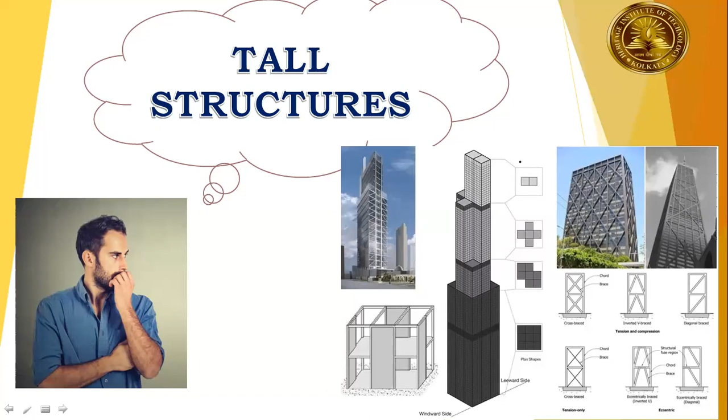Whenever we talk about tall structures, the first question that comes to mind is what should be the height of the structure so that we can consider it a tall structure. Because structures, according to designers and architects all over the world, are mainly classified into three basic types, even though that is subjective: low-rise, mid-rise, and tall or high-rise structures.

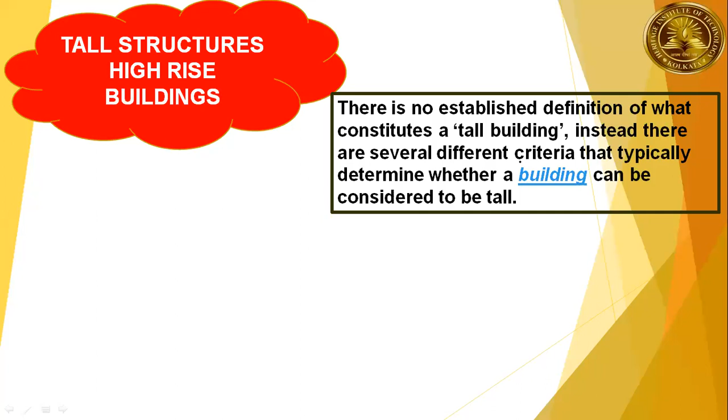As I told you, tall structures or high-rise buildings do not have a particular definition given in the code or some guidelines. It is very subjective. Actually, a tall structure depends on the surrounding environment or the height of the surrounding buildings existing nearby. As a basic criterion, the National Building Code in 2005 defined a high-rise building as a building with more than 15 meters or 5 stories.

It was way back. You can see it was defined in 2005 and it is 2022. So over the last decade, this definition has changed and it has been updated to a height of, just a minute.

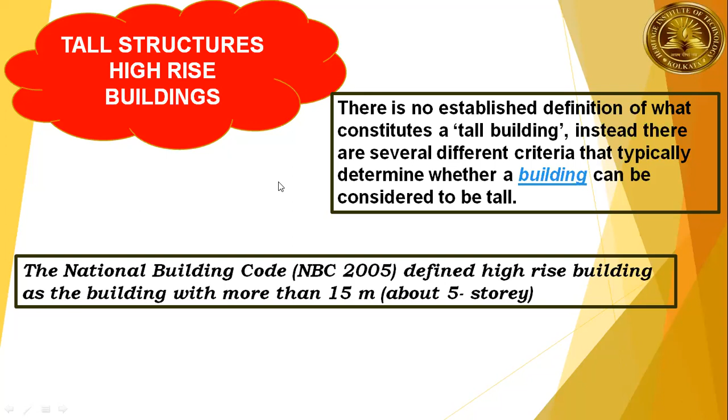So over the last years, this definition has advanced, so that we can define a tall structure as having a height of more than around 50 or 60 meters. The Council on Tall Buildings and Urban Habitat, a foreign organization, defined tall buildings as super tall when more than 300 meters.

Sometimes super tall buildings have turned into mega tall buildings, with height more than 600 meters. If I take the height of a floor as 3 meters, that is almost around 200 floors. So usually when the structure contains more than 100 or 150 floors, we consider it a tall structure, skyscraper, or high-rise building.

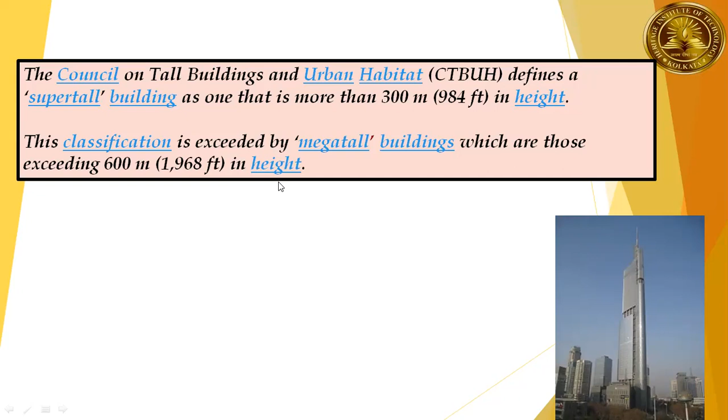With the advent of the design and construction of these structures, a key point comes into the picture: along with the wind load, we also have to consider the seismic or earthquake load. We have Indian codes, IS 1893, 2002 version and 2016 version, which talk about seismic analysis. These are some of the well-known and renowned structures all over the world.

Now coming to the seismic or earthquake study. Before directly going into how to calculate the earthquake load, we have to first learn about the basis of earthquake engineering. This basis of earthquake engineering lies in geology.

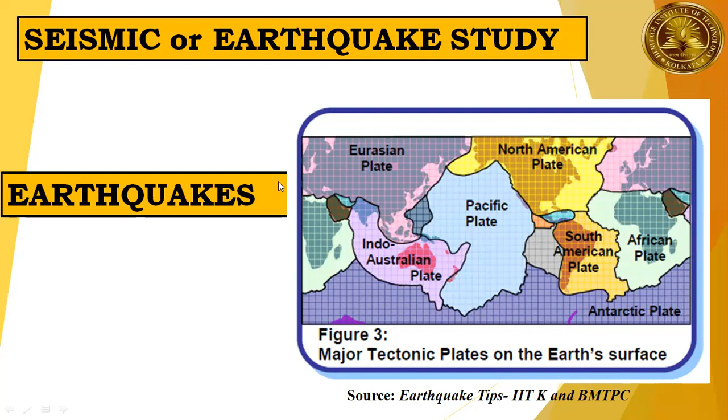The major tectonic plates of the Earth's surface are basically classified into 6 to 7 different plates. We have the Eurasian plate, North American, Pacific, South American, African, Indo-Australian, and Antarctic plate. Our Indian subcontinent lies on the Indo-Australian plate.

Now, what is the main thing concerning this plate? Whenever these different plates lying beneath the Earth's surface collide with each other, either in convergent or divergent form, a huge amount of energy is released in the form of elastic waves. This huge amount of energy developed beneath the Earth's surface causes excessive stresses, resulting in seismic excitations or seismic tremors. These are also known as earthquake excitations or ground motion.

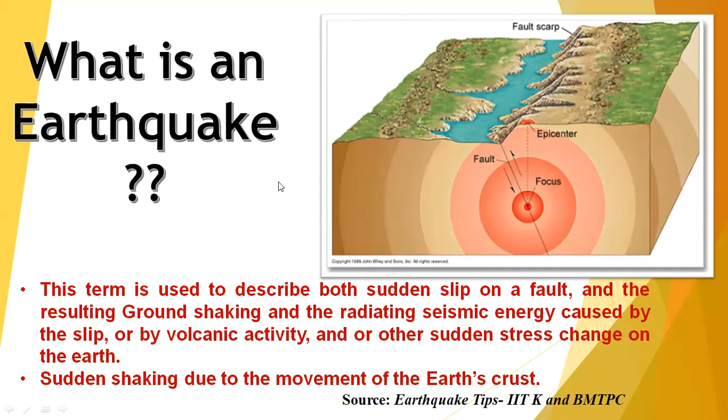Coming to the pattern by which tectonic plates collide, they can be parallelly colliding, like there are some slips. We can see the zone where the two plates collide, or stresses generated at the interface. This is called a slip or fault, also known as the fault line.

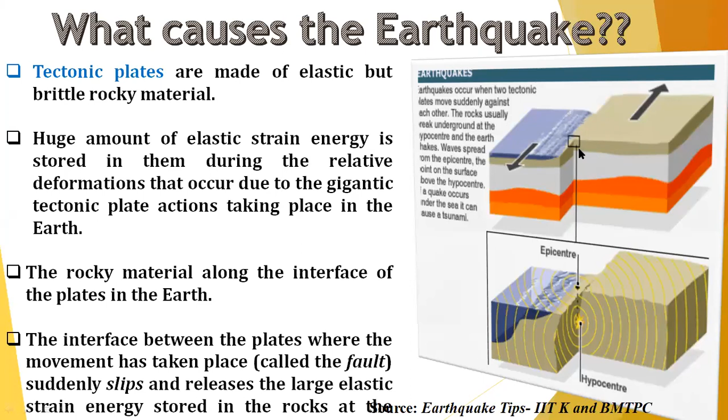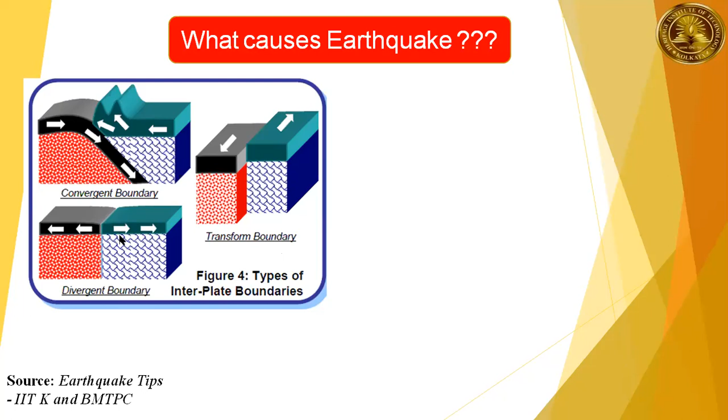Sometimes we have a convergent form of collision. We have a transform boundary, where two plates are parallelly sliding against each other in opposite directions, or sometimes divergent boundaries. So three types of boundaries or faults can take place.

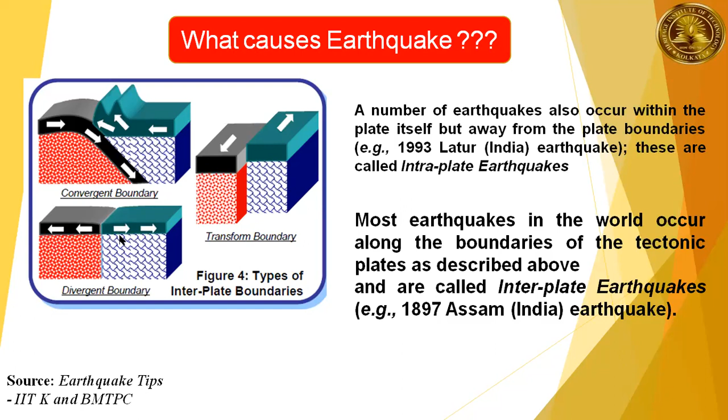Most earthquakes in the world occur along the boundaries of tectonic plates. We have the interplate earthquake, which was the result of the Assam earthquake in 1897. Some fault took place where the plate boundaries collided face to face, which is called an intraplate earthquake. That was also the result of the 1993 Latur earthquake.

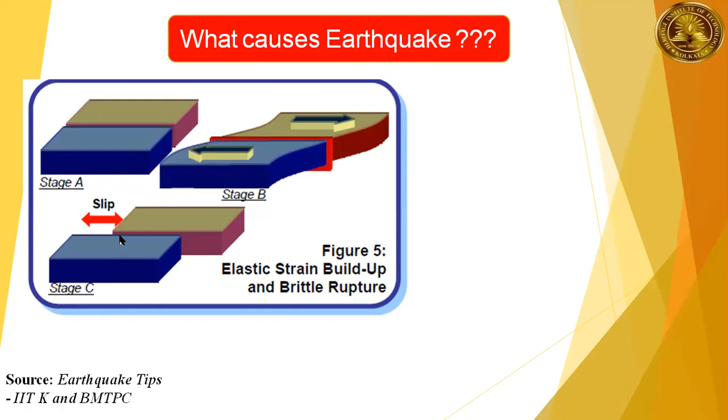So these are the various types of slips. As I told you, there are many types of faults or slips that take place causing earthquake tremors. This energy dissipation involves a huge amount of energy, which causes earthquake waves acting on the structure.

Now we can see the elastic rebound theory, or we can see that the energy is basically in the form of dynamic loading. I would just intervene one second.

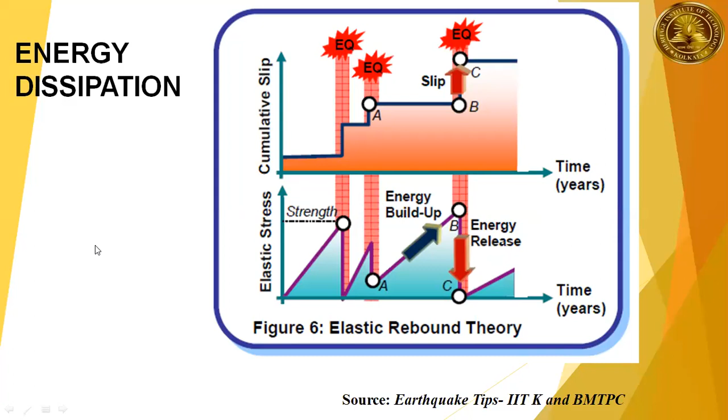So coming to this, how does the ground shake? After the dissipation of energy, there are ground tremors. These ground tremors or ground waves are also classified into different forms: surface waves and body waves, acting on the surface of the earth or sometimes beneath the earth's surface.

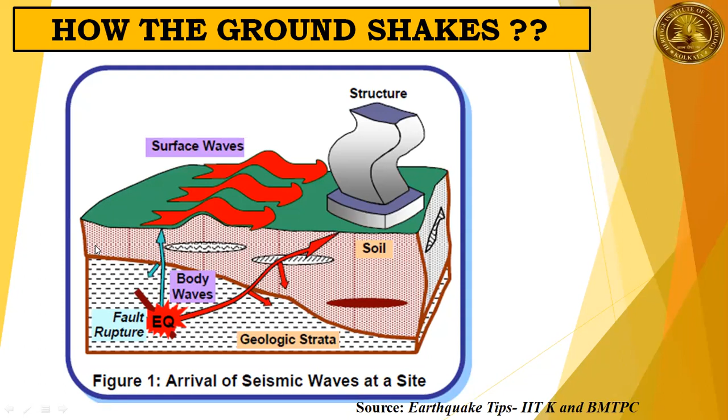We mainly have P waves and S waves. P waves are basically body waves, and there are also surface waves. The body waves consist of primary waves and secondary waves, and the surface waves consist of Love and Rayleigh waves. P waves are transmitted in a push-pull format, meaning some zone is extending while some zone is compressing. S waves involve side-to-side vibration taking place.

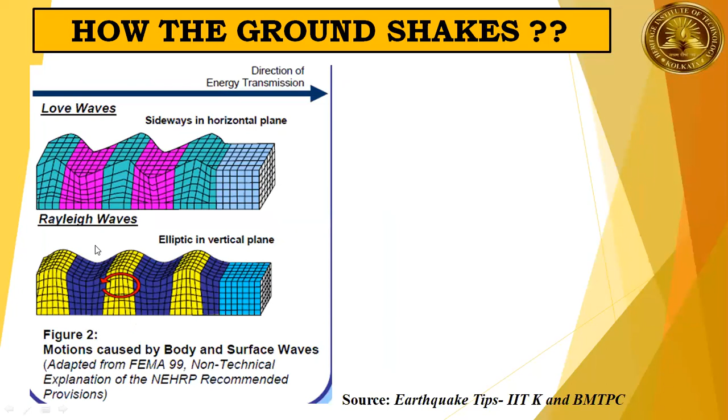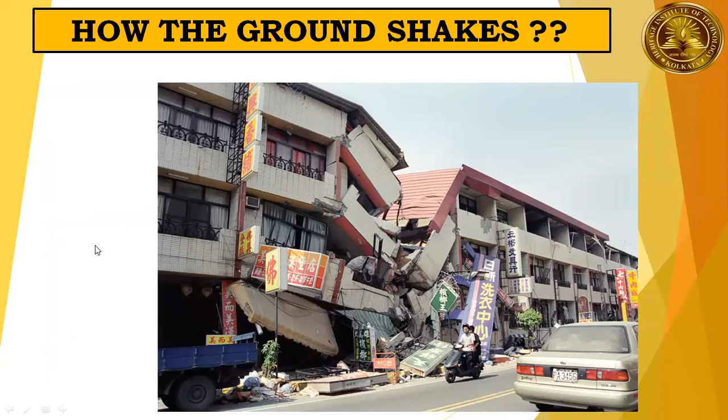We also have Love waves and Rayleigh waves. Compared to all four types of waves—Love waves, Rayleigh waves, S and P waves—the S wave is more disastrous. As we know, the after-effect of ground excitation is complete collapse of property and loss of human life.

So if we talk about how to find out the seismic measurement, or how to calculate the earthquake forces acting on the structure, the first type code was IS 1893 Part 1 2002. This is the old code. Now we have the 2016 version, which is the new code.

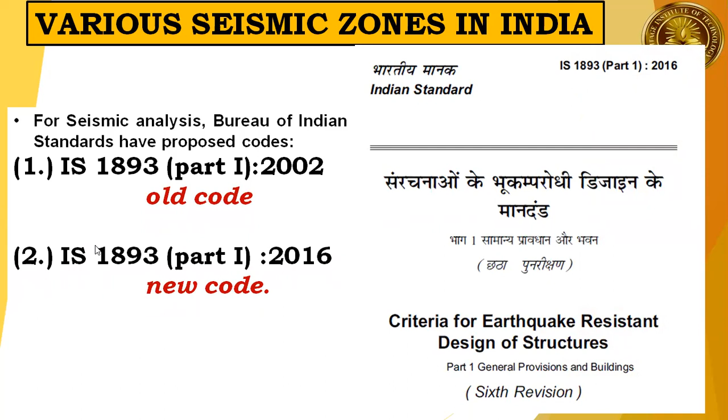So this is the front page, the IS 1893 Part 1 2016. This is the latest code, which had some revisions based on the older code. So if you talk about some past earthquakes which took place in India, these are based on the study.

So how did the study take place? The study was based on a huge amount of data obtained from the Geological Survey of India, collected over the last 100 to 200 years. Based on this data, the date of the event, time, magnitude, area, and the amount of loss of life and property loss were studied.

Based on this study, the various seismic zones in India are classified into 4 main zones: zone 2, zone 3, zone 4, and zone 5. As we progress from zone 2 to zone 5, the intensity increases.

Now what are zone 2, zone 3, and zone 4? Zone 2 is basically the area which is plain land, not hilly areas. So these plain land areas are less susceptible to earthquake damage.

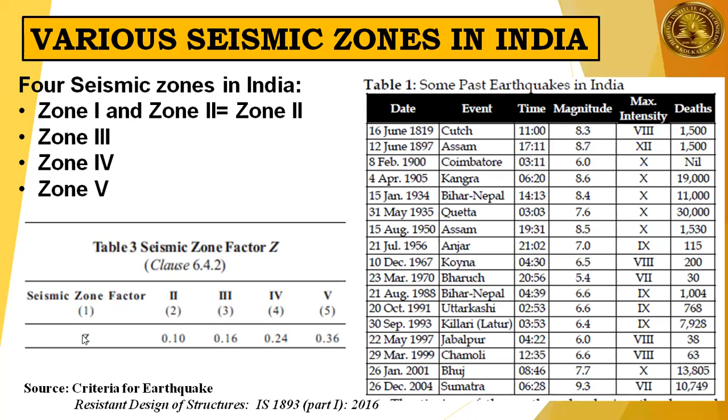Along with these zones, we have the zone factor value, the Z value. This value will be required later when we learn equivalent static analysis based on seismic analysis. I will come to those formulas, but for now, let us know that this zone factor has some value associated with the various zones in India. This is the map of various zones from zone 2 to zone 5 given in the older code.

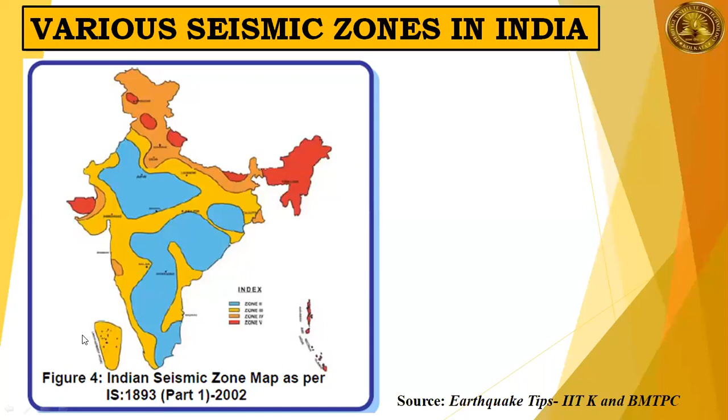Now coming to the mechanism or structural dynamics acting behind earthquake engineering: whenever we have ground motion or seismic excitation acting on the structure, these waves or vibrations are transmitted throughout the building. This is the equation for multiple degrees of freedom, MDOF. We have two types of degrees of freedom systems: single degree of freedom, SDOF, and multiple degrees of freedom, MDOF.

This is the force equation where we have m times x double dot, which represents the inertial force, where x is the displacement, x dot is the velocity or first order differentiation, and x double dot is the acceleration or second order differentiation. So we have mass into acceleration, plus C, which is the damping coefficient, plus K, which is the spring constant, representing the restoring force.

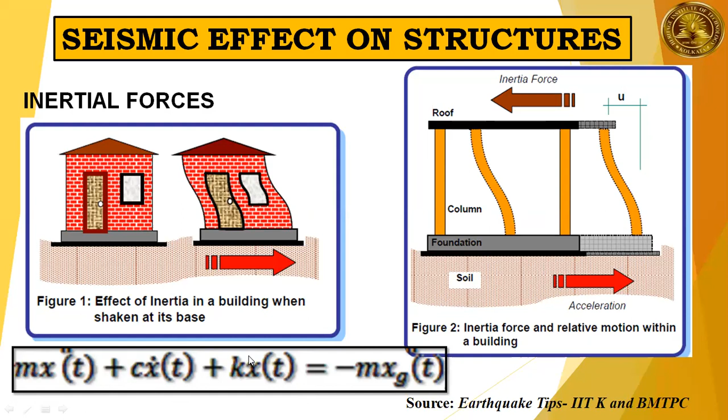This is basically the multiple degrees of freedom equation, the most critical type of differential equation based on which a structure vibrates. Whenever there is acceleration or ground motion acting on the structure, there is some restoring force acting on the building. Based on this mechanism, this equation has been developed.

Now, what are the various directions along which seismic forces act? Since it is a lateral force, just like wind load, earthquake load acts in the horizontal plane. If we take X and Z as the horizontal plane, we can have forces in positive X direction, negative X direction, positive Z direction, and negative Z direction - positive X meaning the right side and negative X meaning the left side. So the forces act in both directions of the X and Z directions.

This is how we put the loading, or impart the loading, on the structure when we model it in finite element software like StaadPro or ETABS or other sophisticated software.

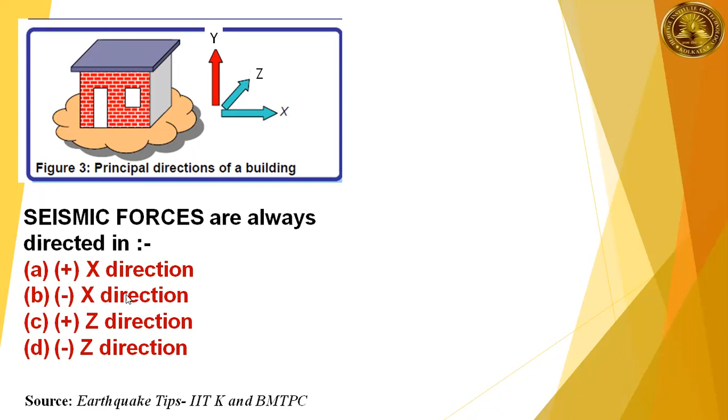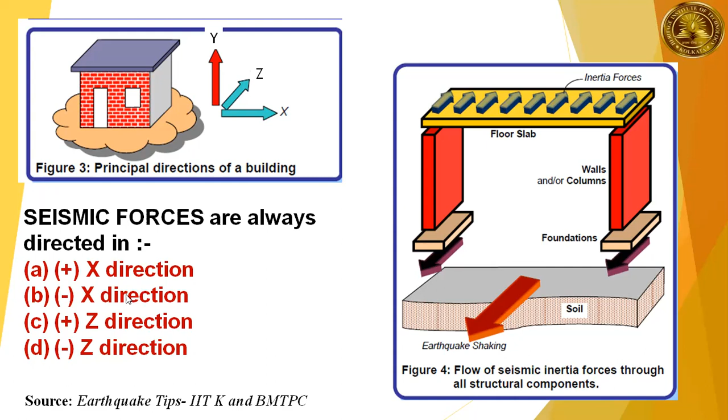So this is another pictorial representation of how the inertial forces act on the slab, walls, and columns, and the foundation. The foundation will be shaking in the direction of earthquake, while the beam, columns, and slab will be subjected to inertial forces in the opposite direction.

The worst effect leads to huge, hazardous loss. I have taken some pictures from the BMTPC guidelines. The left corner diagram shows the collapse of a masonry structure. The right side shows the collapse of an RCC structure which took place in Bhuj, Gujarat in 2001. After this Bhuj earthquake, the entire approach to earthquake study in India changed.

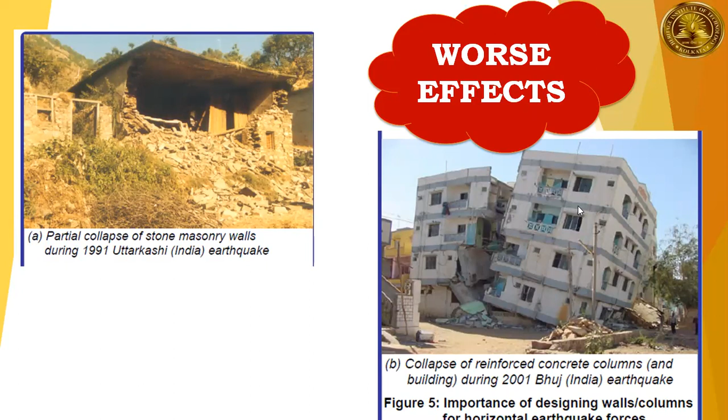Now coming to what is the solution. The solution is basically the performance-based design. Whatever design we studied at undergraduate level takes place within the elastic limit - elastic design according to IS codal provisions like IS 456/2000 or IS 800/2007 for steel. But nowadays, besides architectural and aesthetic considerations, we have to go beyond the elastic limit and design for inelastic loading also.

So this is the advent of performance-based design. What is performance-based design? It is a special, advanced type of design, apart from normal traditional designing, which takes into consideration what will be the performance of the structure post-earthquake. That means we will be able to visualize the type and pattern of failure if a hazardous earthquake or natural calamity occurs on the structure.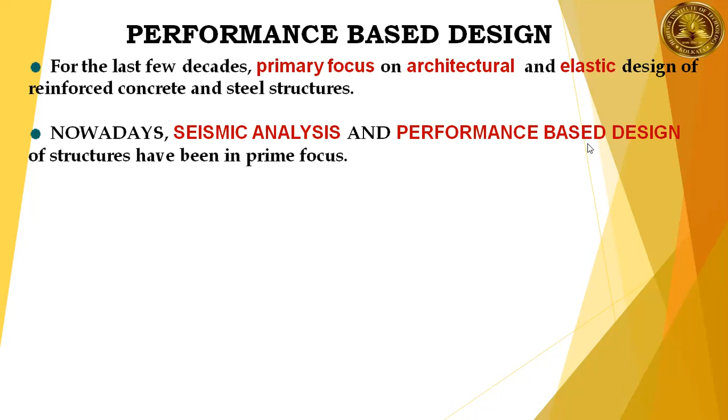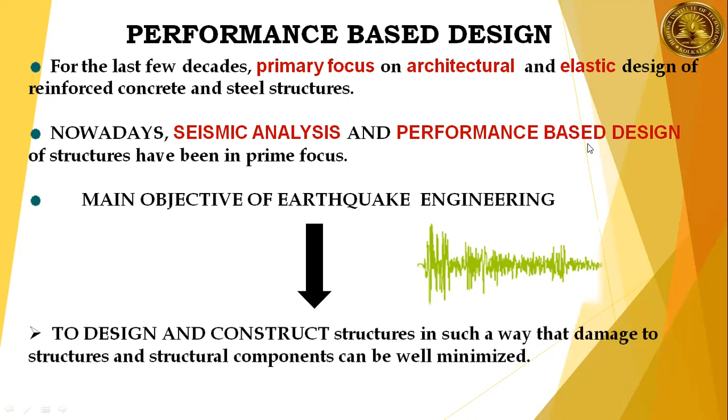Since today we are more focused on seismic analysis, I will be discussing earthquake forces. The main objective of earthquake engineering is to design earthquake resistant structures. There is nothing called non-earthquake design - the design is earthquake resistant structure.

That means it has three philosophies. Coming back to the Indian IS codal provisions, the main philosophy is that we have to design and construct an earthquake resisting structure which will be able to minimize the loss of property and life whenever earthquake hits the structure. It is absolutely impossible to save aesthetic properties like glass, facade, doors, windows - this property loss cannot be curbed. But the main philosophy is that the total integral structural property should not fail.

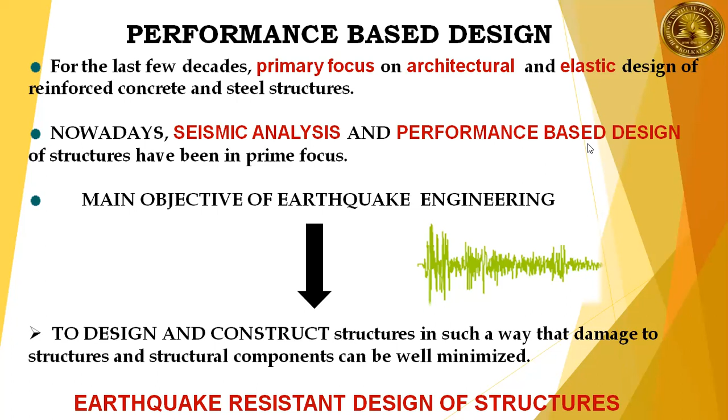That means we will be able to design such structures which will minimize the loss. We cannot completely eliminate the loss.

Now coming to the latest code, I will be discussing various codal provisions based on IS 1893 2016 version. We all know the main concept was derived from the 2002 code, so whenever we learn the 2016 version code, we have to also go through the 2002 version.

So we have dynamic analysis and the simplified or direct method. This dynamic analysis is a more realistic approach - more critical compared to the less tedious, easy method. The less tedious method is the lateral force procedure method, also known as equivalent static analysis method or equivalent static force method. These three methods are basically the same method - a ready-made method.

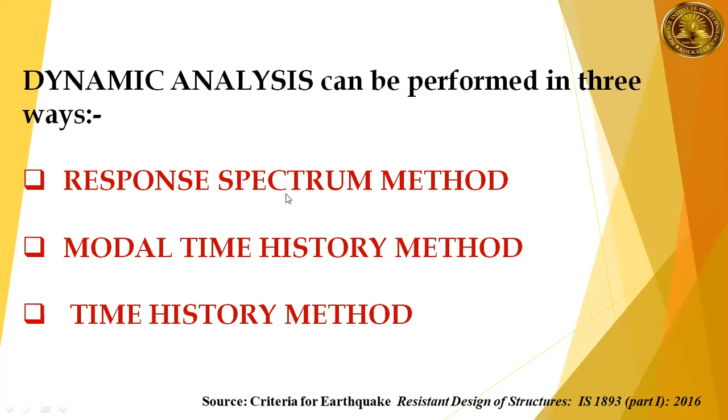As I told you, this dynamic analysis includes response spectra method, modal time history method, and time history method. Another method not mentioned in our code, but mentioned in foreign codes like FEMA (Federal Emergency Management Agency) FEMA 356 given by the US, includes pushover analysis. Pushover analysis is basically a static analysis, but inelastic static analysis. This is also a performance-based method.

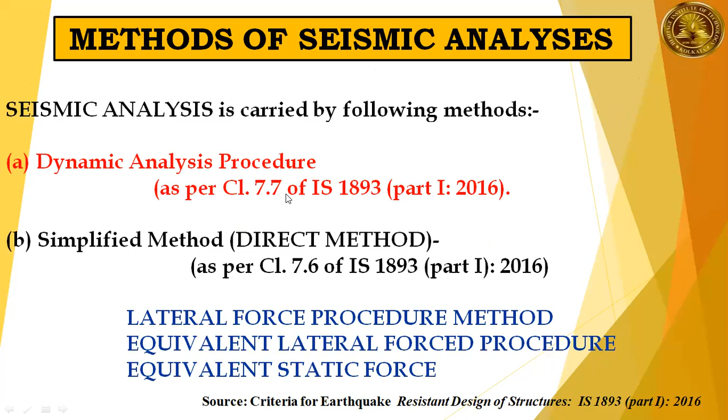So coming to the equivalent static analysis according to the 2002 and 2016 version. So first of all, what do we have to find out? These earthquake forces are transmitted throughout all the floors of the structure. At every floor, this total load is distributed based on a certain formula. So before that, the first step is to find out the natural time period, the natural time period with which the structure is vibrating.

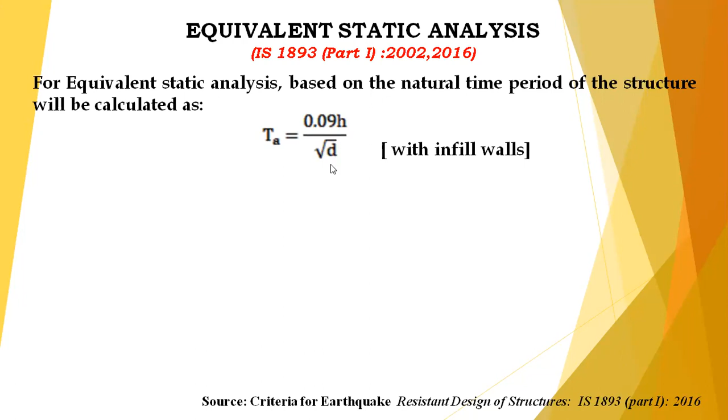This time period may be different for different structures. It can be defined for RCC. This time period formula can be defined for steel structures like that. Now, this is a formula: time period is 0.09 H divided by root D, where the structure is containing infill walls. That means we have partition walls as well as exterior walls. This is the realistic approach.

That is 0.09 H, H means the height of the building, divided by root D. D is the dimensional length, the length along the dimension, for example the X direction. So we will take the plan of the building and measure along the X direction how much the length is. And for the Z direction also, we will calculate the length. So basically, we will have two natural time periods, Tx in the X direction and Tz in the Z direction. The minimum of these two time periods will be considered.

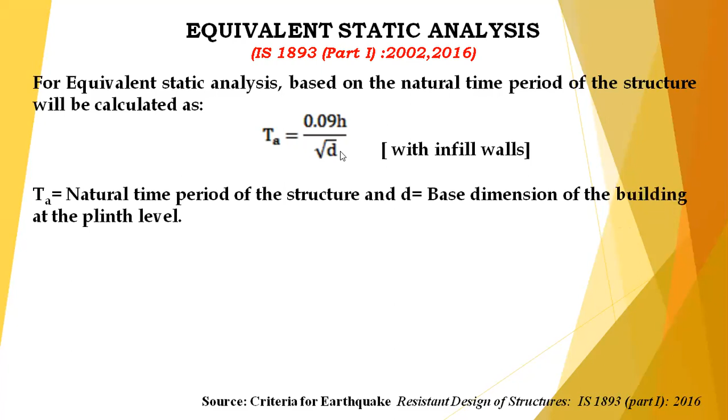So everything is given. After calculating the natural time period, we will calculate the design horizontal seismic coefficient. It is a coefficient based on all these parameters, where Z is the zone factor. Zone factor, as I told you, is a value based on zone 2, 3, 4, and 5. I represents importance factor. SA by G is the response spectra coefficient. R is the response reduction factor. All these values of Z, I, SA by G, and R are given in various tables of this IS code.

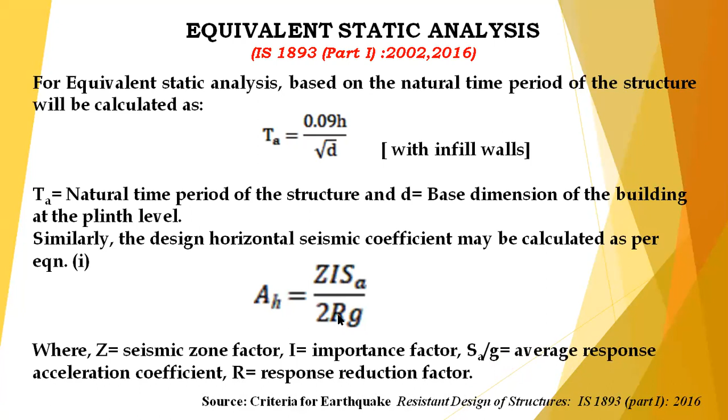As I told you, Z seismic factor and the various representations are already given in the slide. This picture is the codal provision given in the code, in clause number 6.4. The Z seismic zone factor is given in table 3. For the importance factor, we have values like 1.5 for critical and lifeline structures, that is more important structures, 1.2 for business structures, and 1 for the rest. Similarly, we have the response reduction factor also given.

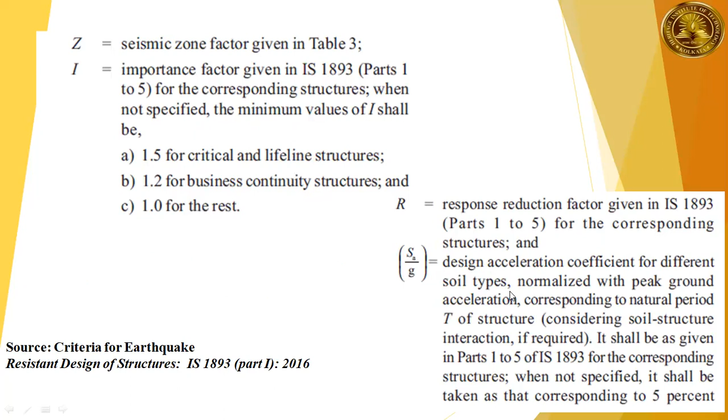SA by G is the design acceleration coefficient. This design acceleration coefficient is a parameter which is dependent on the type of soil as well as the natural time period. So see here, we have rocky or hard soil, medium or medium stiff soil, and also soft soil. Based on the value of time period T and the type of soil, we can select the value of SA by G.

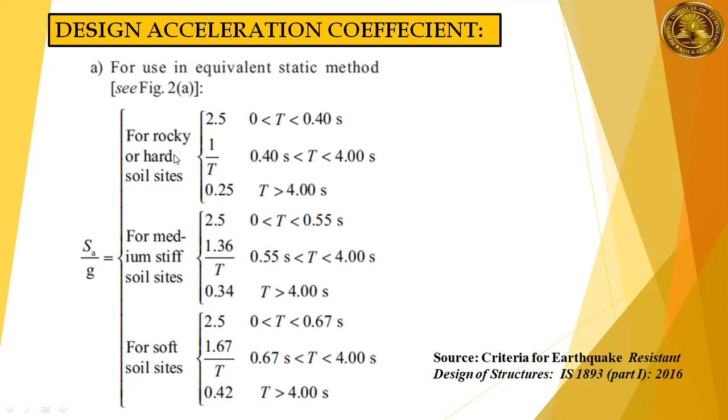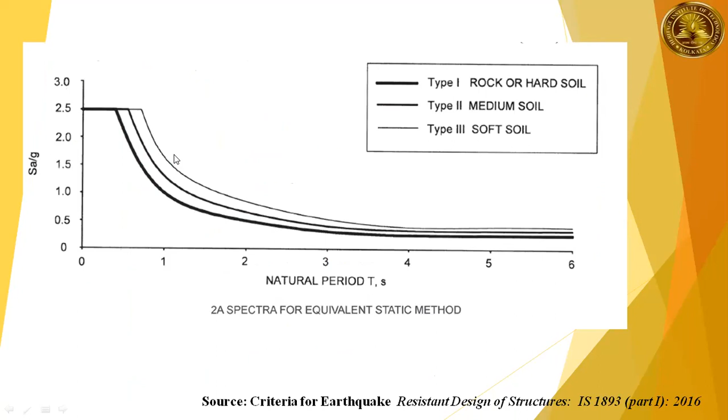Now we will check what type of soil it is. If we design a model structure in Kolkata, we have to go for soft soil. If we have to design a building in Darjeeling, it is rocky soil. So this is the SA by G graph. It is the plot obtained for type 1, type 2 and type 3 soil. It's a graph for response spectra, but we don't mainly need this graph.

Pardon, yes. Saira, please mute yourself. Yes, ma'am. Sorry, ma'am. Person with the name Saira, please mute yourself. You can carry on, Saurabh.

Okay. So coming to the damping ratio, zeta.

So the damping ratio is basically a value which is dependent on the type of structure. For RCC structure, the damping ratio is 5%, which is given in the code as 0.05, while the damping ratio for steel is 0.02, that is 2%. For RCC it's 5% and for steel it's 2%.

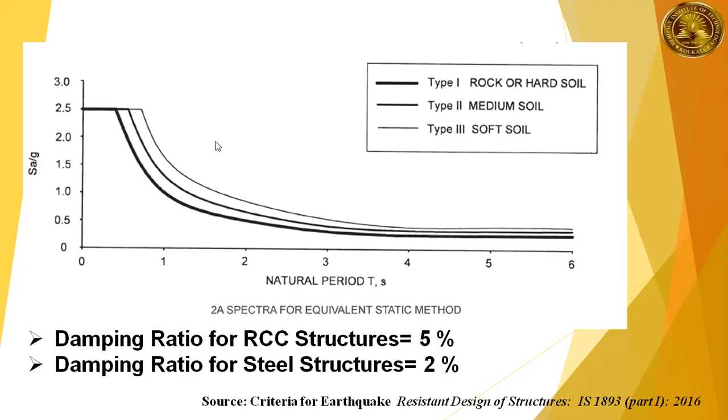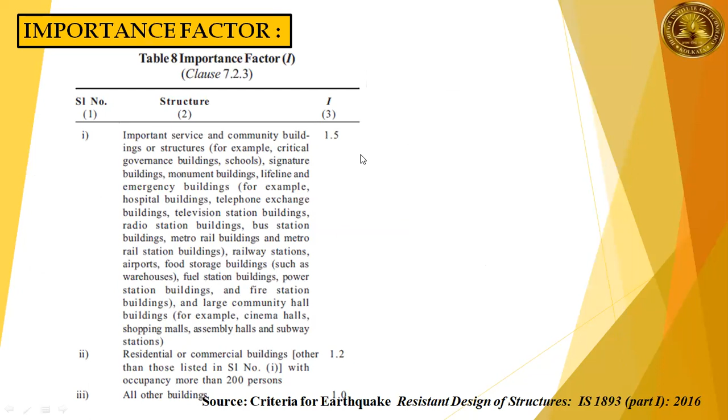Now, this is the importance factor. The importance factor we usually take as 1.5. We take all the buildings as important buildings, whether commercial, residential or institutional.

So coming to the response reduction factor, this R value is dependent on the type of moment resisting frame: ordinary moment resisting frame, OMRF, and special moment resisting frame, SMRF. Initially in the 2002 version code, the values were much less specific. But in Table 9 of the 2016 version code, we have a lot of data, a lot of values given.

OMRF is basically the ordinary moment resisting frame, or the frame structure which is designed according to IS 456:2000, the normal RCC code. For SMRF structures, we have to consult the ductile detailing code, that is IS 13920. IS 13920 has also been advanced. Earlier it was the 1993 code, now it is the 2016 code.

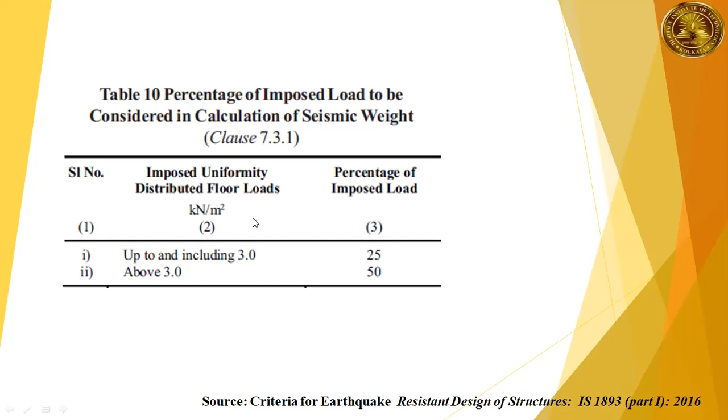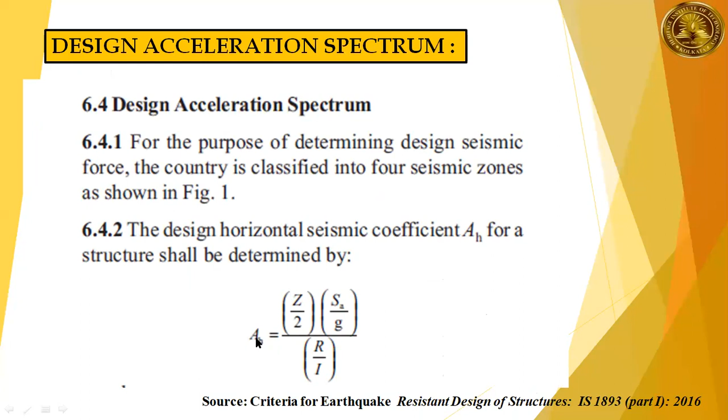So after getting all these values, that is the seismic zone factor, response acceleration coefficient, response reduction factor, and importance factor, taking all these values from the table, we calculate the seismic coefficient. Now, using the seismic coefficient, we calculate the design base shear VB. The total design base shear or seismic base shear VB is calculated as Ah multiplied by W.

So what is this W? W represents the cumulative seismic load. That means for every story, every floor, we have to calculate the weight of the floors, meaning the weight of the columns, slabs, all the structural elements. And we have to take the cumulative of all the seismic loads. That is W. So the design base shear is this equation.

And after that, based on design base shear, we have to find out the lateral forces, that means how much force is distributed among the floors. Qi represents the design lateral force acting on each individual floor level. Seismic weight is taken at the ith floor, that means at the respective floor: i is 1 for the first floor, i is 2 for the second floor, like this.

So, after calculating the design base shear, we calculate the lateral forces acting on the structure. And after that, we have to plot the variation of base shear as well as lateral forces acting on the structure, and check the pattern of the graph.

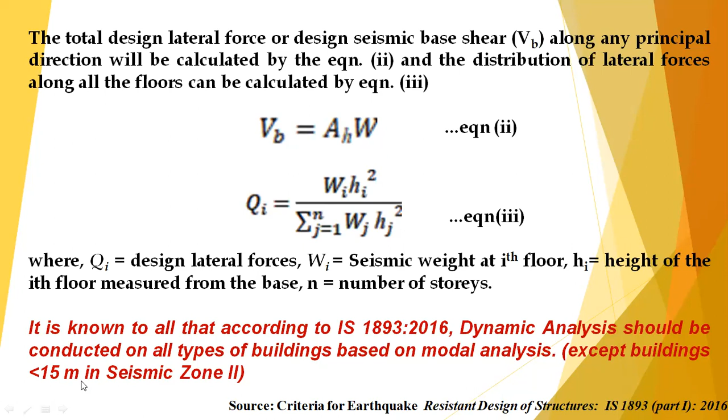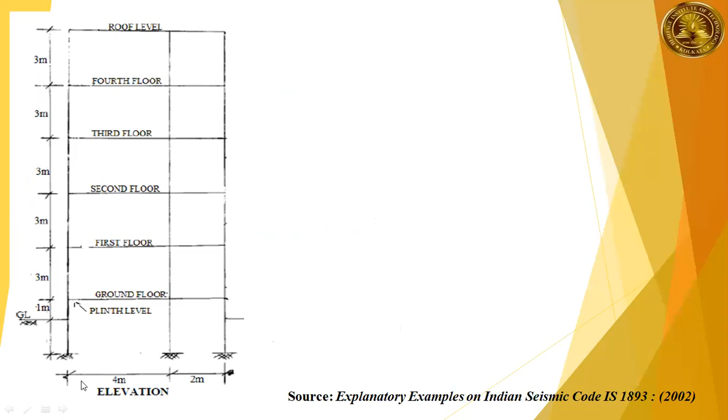So it was G+4. We have the plinth level 1 meter and all the floors are 3 meters. It's like a corridor shape. The school building is a very small school building. It is very much rectangular in plan.

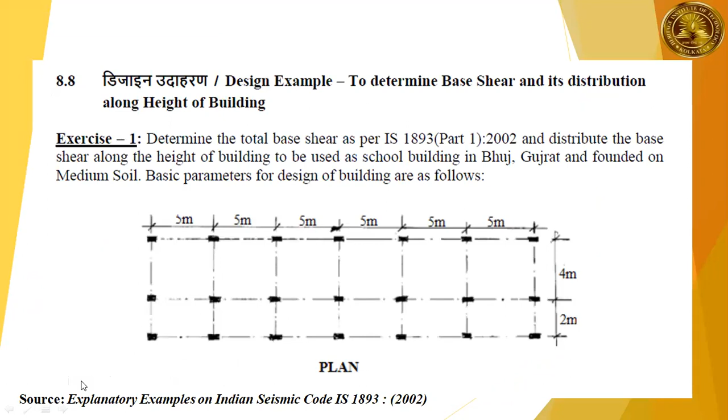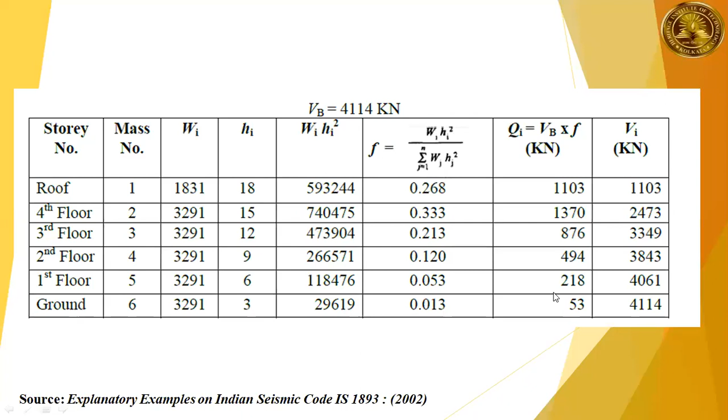So now the last part is that we have to plot the graph. As I told you, these are the values we have got at the respective floor levels, mentioned here. At the ground level, we have 53 kilonewton. At the first floor level it is 218. Second floor level 494. Third floor like this.

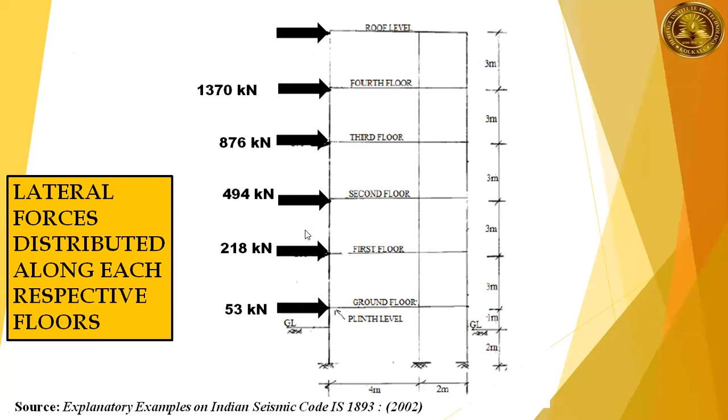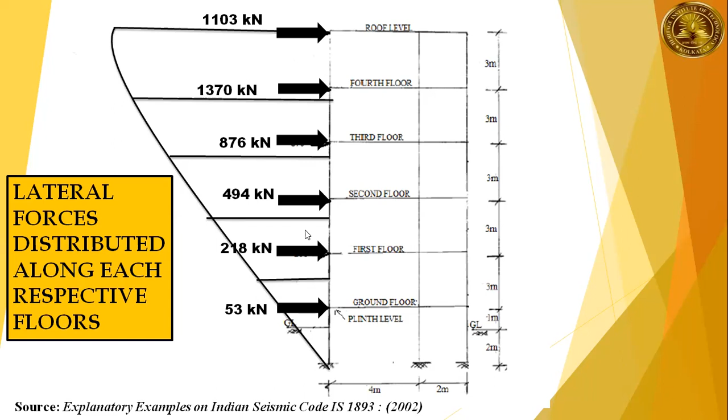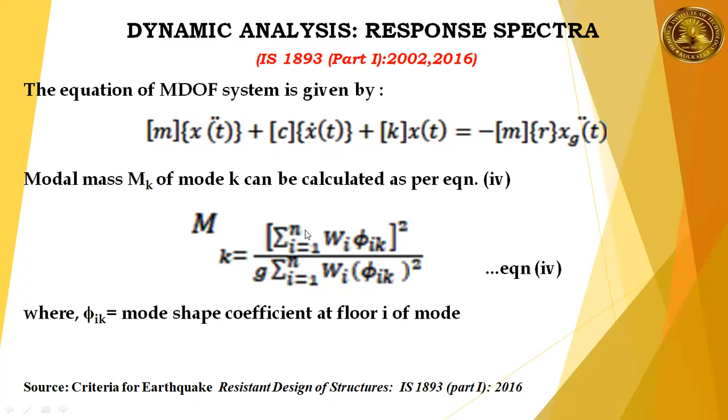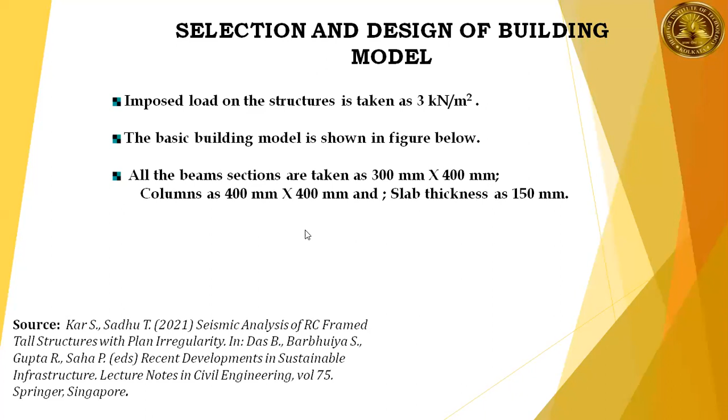And I will show you all these data we have to take: what amount of live load we have to consider, the dimensions of the columns, beams, and slabs. And this was our elevation. This paper work was done by my undergraduate students, a group of 10 students.

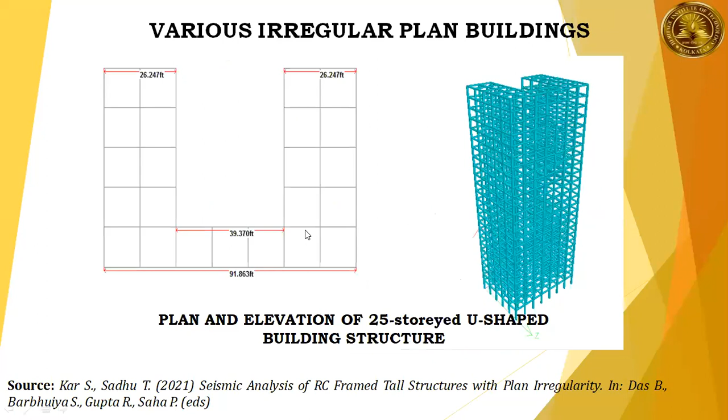So we considered a 25-story U-shaped building. We can see the plan as well as elevation. I have taken X-shaped building, L-shaped building, and inverted T-shaped building. Our motto was to study the impact of this irregularity in plan: in which case will the earthquake effect be hazardous? U, X, L, and inverted T.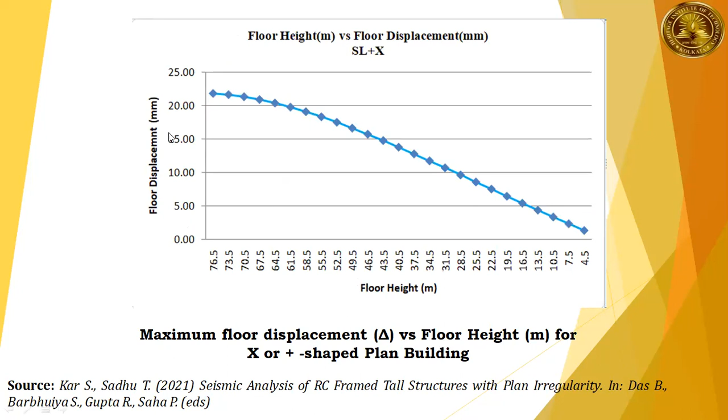Then, as we move from the ground to the top level, the floor displacement increases. So this was for the U-shaped plan building. Similarly, for the X-shape, the displacement was around 22 millimeters. For U, it was between 16 to 18 millimeters. For X-shape, it was 20 to 25 millimeters.

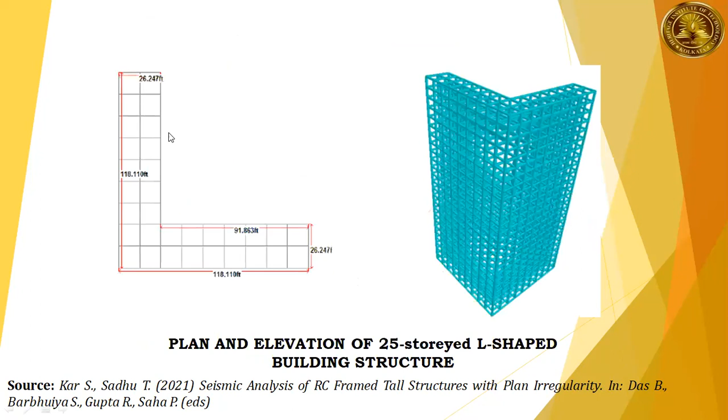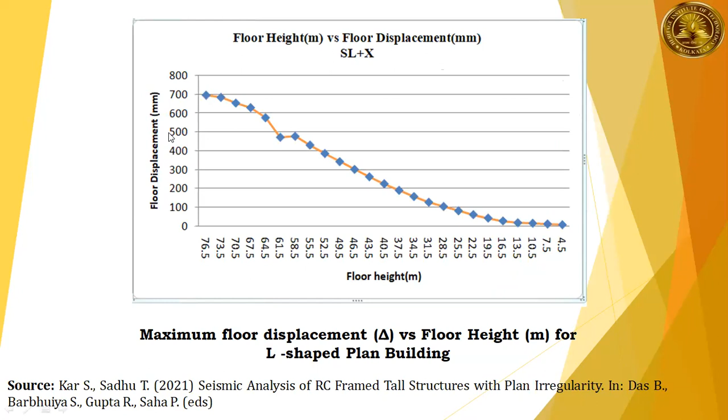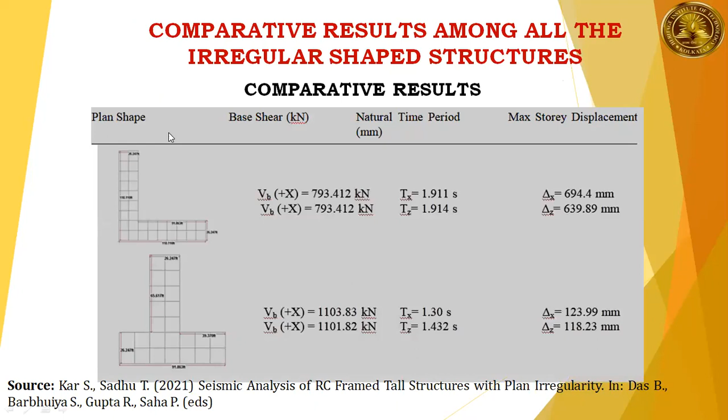So whenever we have to plan any building which is X-shaped or L-shaped in plan, we have to take into consideration the hazardous effect, as well as properly design and construct the shear wall. So this is everything regarding today's session.